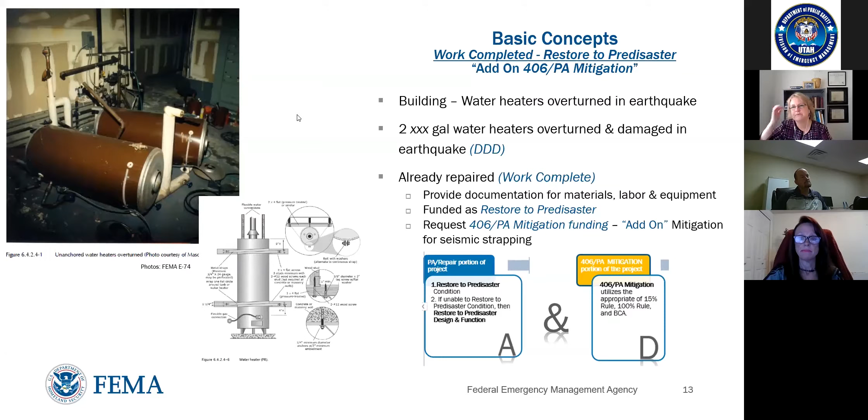FEMA has a lot of really good building science documents. This is from E74 - they have hundreds of things for different conditions. I really recommend FEMA.gov, and that was in the link in one of your handouts.

What is the problem? So, okay, I know FEMA's coming into town, or I just think this will work, and maybe the president will declare a disaster, but sometimes it takes a while. So I'm going to take this informed choice, this informed risk, of putting it back with the bracing.

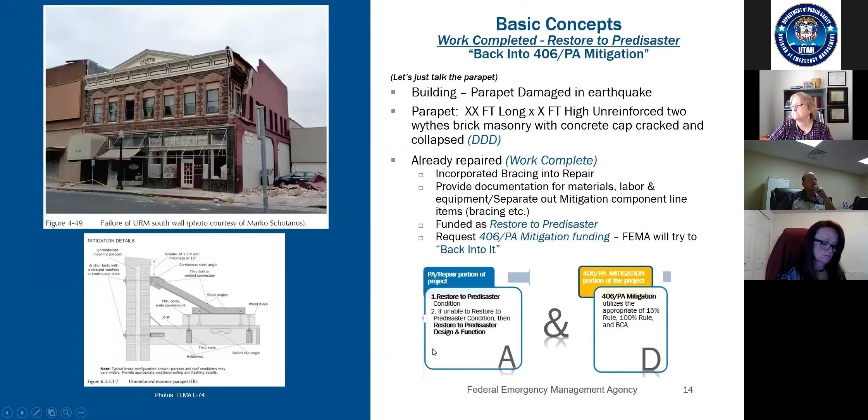You're going to figure out a line item, scope of work, and a cost estimate to put it back exactly the way it was. Now in the process, and Kevin can talk about it more, FEMA puts it back to pre-disaster condition, and FEMA has mechanisms to cost estimate all of this as you go through the process. But it behooves you to get engineered stamped estimates, because it gives you more options early on in the formulation of your project.

So we do the line item, scope of work, and cost estimate for restore to pre-disaster work. You evaluate for the code triggers in B - likely there are none. If this had been broken glass next to a door, then that's where you would have funded putting back the tempered glass.

Then you think about what's the line item and cost estimate for that - how much will the tempered glass cost? Then you can evaluate for the 406 PA mitigation - is there extra bracing? Can we help with the lights and put some extra bracing in? Those kinds of things, and consider that funding.

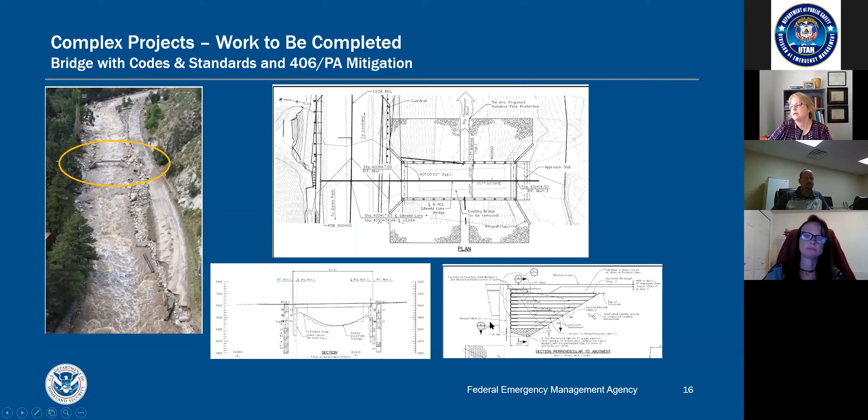So when we talk about the 406 mitigation, will it work? You're addressing the damage. In this case, we did some mechanically reinforced, stabilized approaches. We knew the cause of the damage was water going around the bridge and washing out the approaches, so that's going to armor that. This was a bigger project for the whole corridor, but it will reduce or eliminate similar damages from a similar event by providing a larger opening under the bridge, armoring the abutments, stabilizing the approach road and integral ground. It will reduce susceptibility to debris and erosion damage, and provide increased flow capacity.

The mechanically stabilized backfill supports the approach road integral ground. That's kind of the definition of these kinds of facilities, you have to have compacted soil or cover on a pipe. That's part of the damaged facility, because you have to have that cover. I think that's it.

And we go back to buildings. I want to flag that for earthquakes, FEMA does have specific eligibility criteria for evaluating and repairing earthquake damage for welded steel moment frames. That was the Northridge breakthrough project, the full penetration welds that designers had been using since the 1950s for all these buildings. They all cracked. My coworker had a brand new building at Cal State Northridge, just about ready to occupy, and almost every single one of their welds cracked. That takes removing some of the suspended ceilings and stuff to be able to inspect the weld.

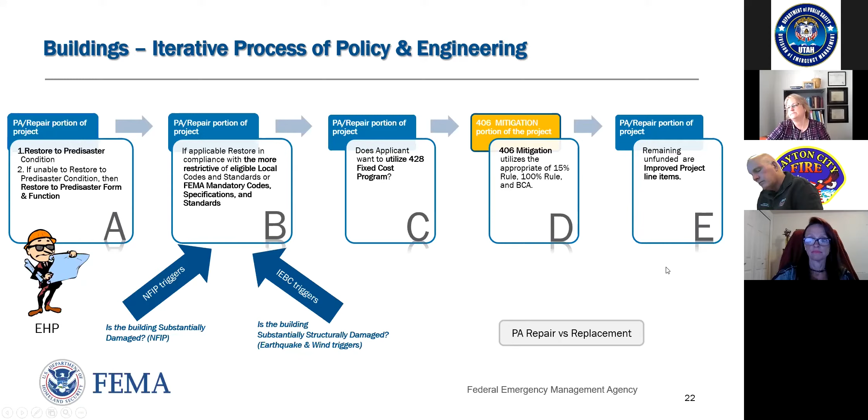So what does all this mean? Even before an event is declared, you are empowered to make informed decisions so that you can take appropriate risks on what you want to go ahead and repair, what you want to wait on, all those pieces. The accurate damage description and dimensions are critical to the project and the funding. It sets up what the restore to pre-disaster condition is, and that funding is what everything else is based on.

An applicant's engineer and the applicant can help define the damage description and dimensions, which leads into what's coming on the next slide, after the break.

You can identify, evaluate, and apply code triggers and code provisions, along with potential 406/PA mitigation measures. They've changed the title in the PA-PPG to Public Assistance Mitigation, but everybody else knows it as 406 mitigation. At Region 8, we're transitioning and using both, using that slash so that we're all on the same page.

You can provide the line item scopes of work and the cost estimates. If it's engineer stamped and signed, that puts extra weight on it being a reasonable cost and appropriate historically, and all of that for FEMA to then validate.

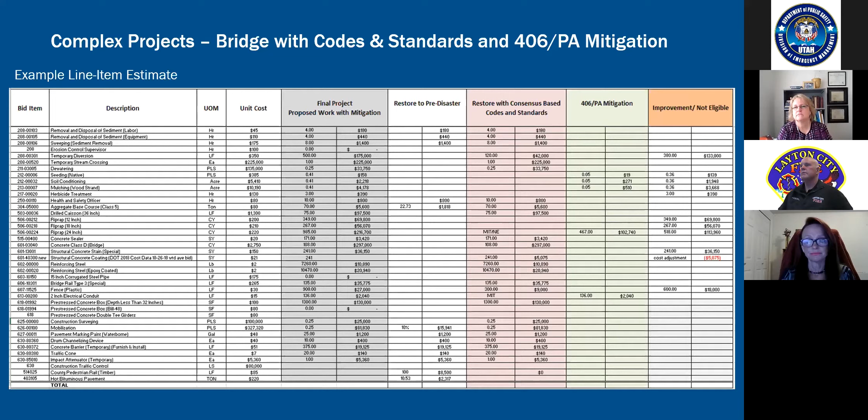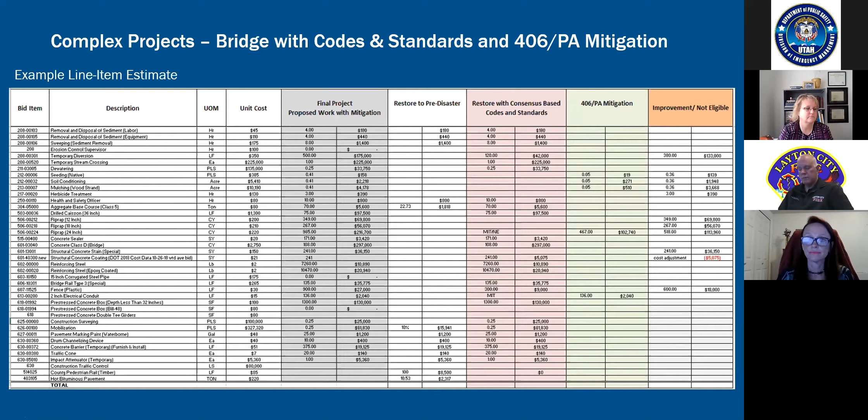Whether it's in this format or something similar, this is how we need to look at the projects and put it back to where it was. What are those codes and standards? Please make citation for them too, so we can reference there and just validate that what you're doing is in there. This allows us to talk apples and apples. It really comes back to needing to agree on the scope of work, the damage description, and dimensions. Then we really start to make those other conversations about mitigation, or is it an improvement?

I see it can be an example. I don't know if Christina or Lori have this in Excel, or if it will be available after the presentation today. The state will be posting it on their hub site. I can't give it to you in a spreadsheet, it's just not ours. That's why I really think in terms of my ABC and boxes, how you do a normal estimate is kind of where I'd like to do it. We'll be sending out the hub site links and all that information, so it's a pretty simple overview they could each type into their own spreadsheet and fix it that way. So we'll give you the idea, you can steal the idea, make it your own.

One other thing I want to mention before we head to break: you, as the communities or as the engineers helping the communities, are the ones who need to bring up what your damages are and what mitigation you want to do. FEMA can't tell you what you're going to do, nobody can give you that. It needs to come from yourself, and if you don't have the in-house ability to look at that and say what's wrong with my building, what went wrong, what got damaged, you need to reach out to those who can, and also reach out to those who can tell you what mitigation would be best so you'd be more resilient in the future.

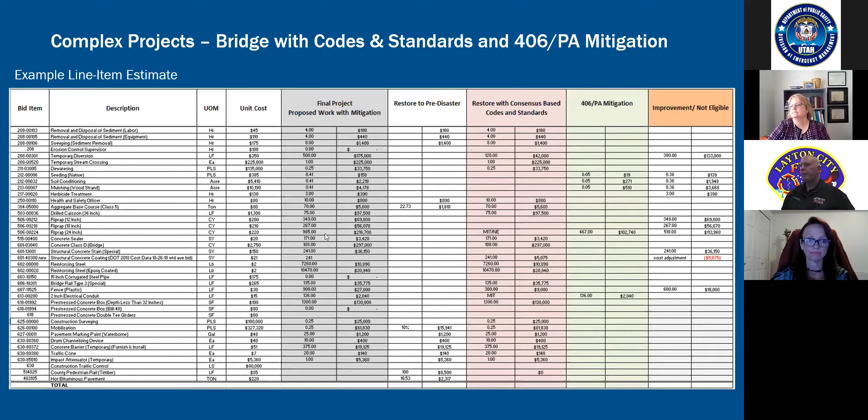But that's going back to step A, identifying what you had 15 minutes before the event and what the condition was.

So that's the important A in identifying that. And that goes back to when we looked at that spreadsheet, all those cost items - it's a mixture of what was there before and what they want to be at after. So that's why it's important for us to take that and identify which column it belongs into.

So back to the Formica - you had Formica, it cost $5 a square foot. You want to put in granite, and that costs $25 a square foot. So you're responsible for the difference there.

Oh, it looks like George has a question. I do. And thank you, Kevin, for answering my question earlier on the chat. But...

Christina and Amber, and I believe Jessica, know all this already, but our church inside has iconography. It is old painted iconography, goes back to about 1925. It is not as simple as just replacing iconography in today's world. It is a specific art and technique. We are in the process now of getting bids on what it would cost to replace some of the iconography that was damaged.

The issue we have is if you replace one icon - let's say it's the big one behind the altar - then the rest have to be replaced because in the Orthodox Church everything has to match up to be uniform. So my question is how does FEMA handle something like that? We may not have every icon damaged, but one replacement would trigger the rest having to be replaced.

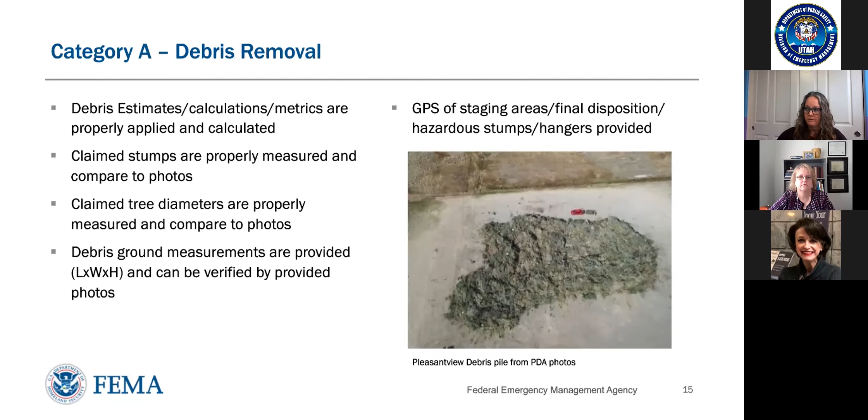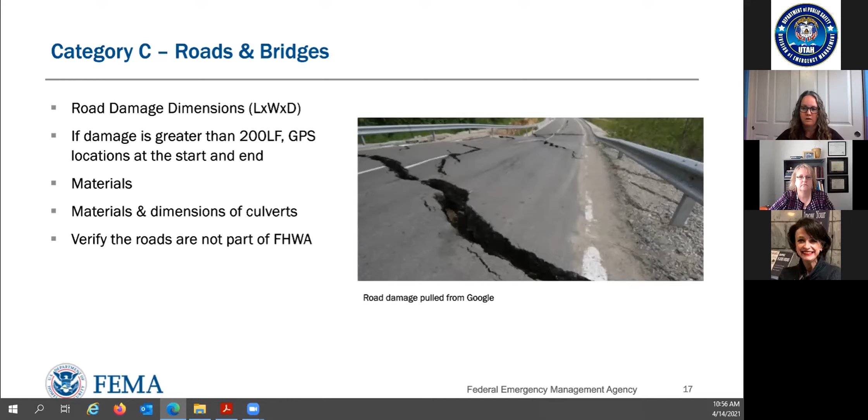If you have any culverts that were damaged, which I'm not sure if we have any for these disasters, but in the event that you do, we need the materials and dimensions of those culverts. And then we're going to verify whether this is part of FHWA. If it is, that's another federal agency. We would look at the type of road it is, and if it would fall under this category.

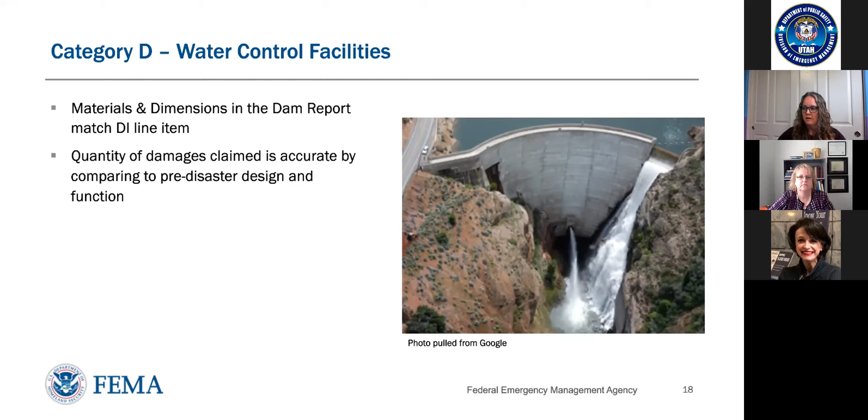So category D, we have our water control facilities. Some information we would need is materials and dimensions. In the dam report, make sure they match the DI line item. A quantity of damages claimed, that it's accurate and compared to pre-disaster design and function. And keep in mind, these are very general comments as to what would be needed. Likely you will need a whole lot more to show your project and how to bring it back to that condition.

Dimensions of damaged components, make sure they match the building size. If you have square footage of your roof that doesn't match the pre-disaster design and function of your facility, we're going to have some questions that are raised. Inventory records, number of levels of the facility, roof type, building materials - make sure they match engineering plans, photographs, technical reports, etc.

Remember that the goal of my team is to draft an accurate DDD. So we want to make sure we're capturing the damage description dimensions of what the event caused, and then contents. The way we think about contents is if you took the facility, flipped it upside down, everything falls - that stuff that falls is your contents. So we would need a contents list and photos of all the damaged items.

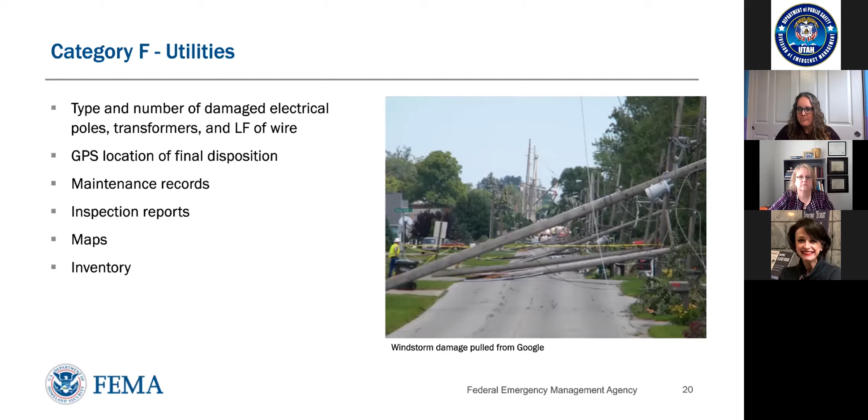GPS locations of the final disposition, such as transformers. Also, if you have a map of the service area that you can show all the sites that went down, that is something that would be very helpful for writing your project. Maintenance records - you're going to need maintenance records no matter which type of category of work this is. That's something that we always ask for in every project, except probably category A. Inspection reports and inventory.

And then our last category is G, parks, recreation, and other facilities. Type and number of facility contents - make sure they match your inventory list, what you had prior and what you have now. Pre and post disaster photos. If you have pre-disaster photos of your facility, that is wonderful.

Something that my team will do during or leading up to the site inspection meeting would be to go on Google Earth and check out the facility. We're going to look at historical photos, and hopefully there's something right after - for major disasters like Hurricane Harvey, they had right before and right after satellite images on Google Earth, so it was really great to be able to see the extent of damage right away. That's not always applicable for every disaster, but that is a common thing that we do when we're validating your damage. And then of course, GPS - that's a repetitive thing. We need the GPS address, location, whatever you can provide to us to show us where this damage is located.

So now we're going to go into conducting these virtual site inspections.

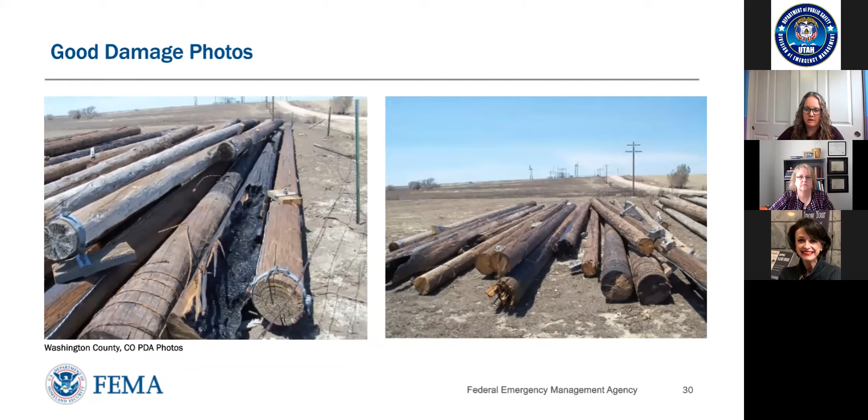Are there any questions on the damage photos right now?

I just want to offer a comment. Since we're doing this virtually, these photos are going to be critical to you being able to articulate the story of what's damaged at your facility or at your park. Think if you were just sending this as a package cold to somebody sitting at their house or in a cubicle in Denver, could they take away from the pictures what you're trying to tell them? We have to kind of recreate it. One of the challenges of being virtual is if we're walking around the building, you can point here and there and show this and that, and we can take those measurements and photos in real time. We really do need your assistance in thinking about it in terms of what you would point out if we were walking through the building or the park together.

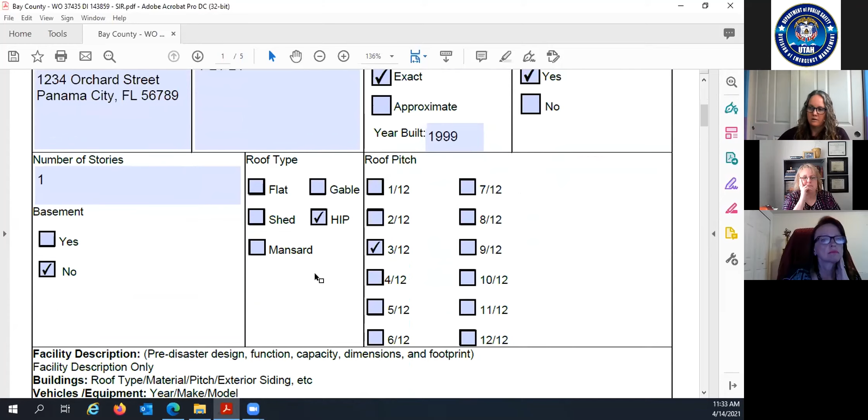So we're gonna select, this is a building - we're actually looking at a gazebo. We made this up for purposes of this training right now. So we're gonna put the physical location address. We have the GPS coordinates, whether you have the exact age or the approximate age of the facility. If you only have approximate, that's fine, we can click that. That's just gonna show you how that is written up in the DDD. If you have legal responsibility, we're gonna select what kind of roof is on it, the pitch, whether there's a basement, number of stories.

This next box shows the facility description, pre-disaster design function, capacity, dimensions, and footprint. So as you can see, this is a gazebo at this location. It's used for gatherings at the H.G. Harder's Park. The park is a 76-acre county park with athletic fields, concessions, picnic pavilions, and playground. This is the size of this gazebo.

And you'll see at the bottom of every page, there's an area for you to sign. So all the information on this page is correct, I'm gonna sign it and approve it. And then the recipient authorized representative's signature as well. So the state can sign these forms as well, saying we all agree that this is accurate.

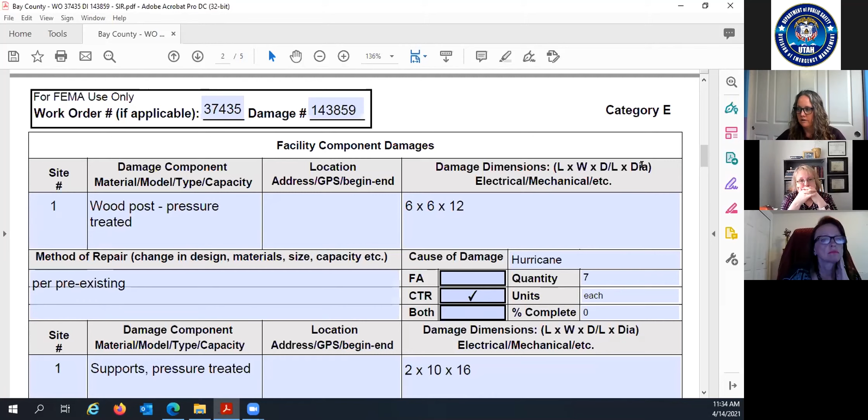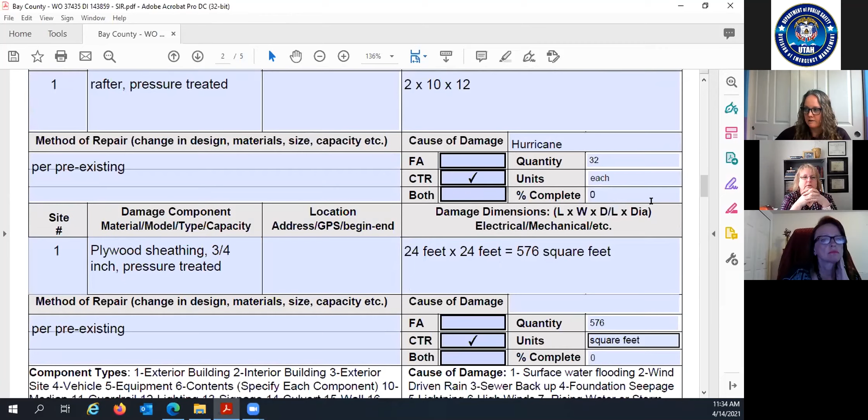So then we go into the site component breakdown. This is where I said we have that Excel sheet that lists all of this information. As you can see on this page, it only lists 5 or 6 sites. And that's it. We go into the sketch next.

So if there's more components than 6, we're going to use the Excel sheet. But you'll see we're talking about this one site, that's all we're writing a site inspection on. We have wood posts that are pressure treated, and we have our dimensions over here. There's no GPS here because we have it up above, but we can put it again in these locations as well.

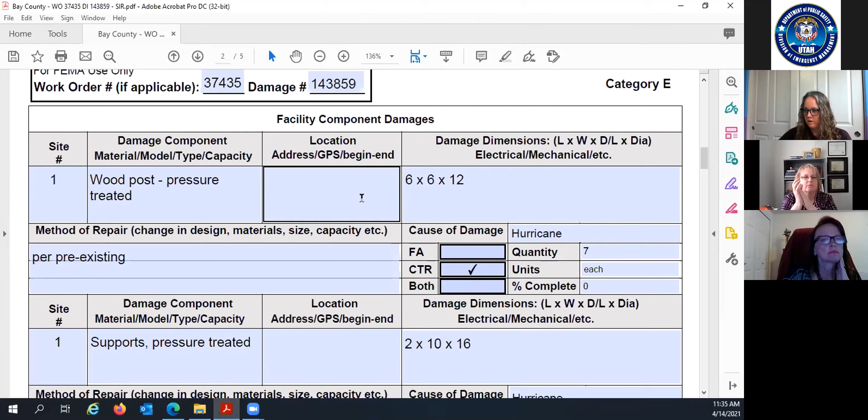The method of repair, we talked about this earlier, things that we'll need in preparation for the site inspection. So are you repairing pre-disaster? It was caused by the hurricane, the amount of wood posts that we would need to restore this facility, and the unit.

These are all - I don't know if this is a drop down. I know on the Excel sheet they're drop downs. This might just be, we have to type in whether we're talking about each, square foot, or cubic yards, etc. And percentage of work complete.

So when you create all of your damage inventory line items, it's early in the disaster, and sometimes these go on for quite a while. Your percentage of work complete could change as we get closer to the site inspection. So if the DI says 0%, and right now when we're doing the site inspection it's now 50%, that's what we would put there.

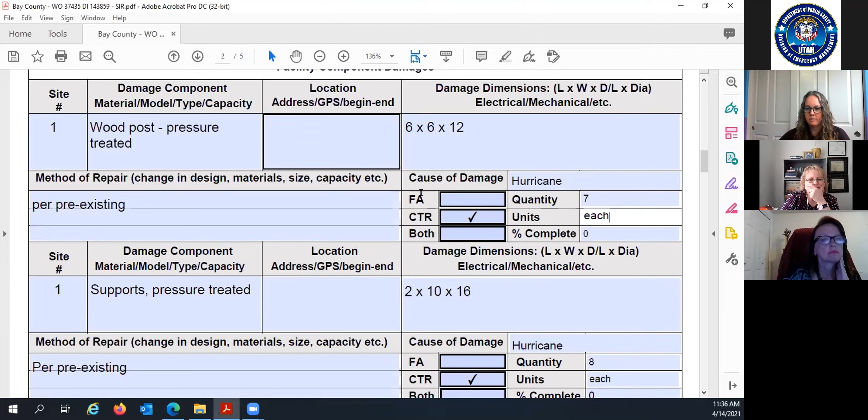The type of labor - are you doing this work by force account labor, or are you going to hire a contractor to complete this work? And we're going down for the other areas of the damage elements.

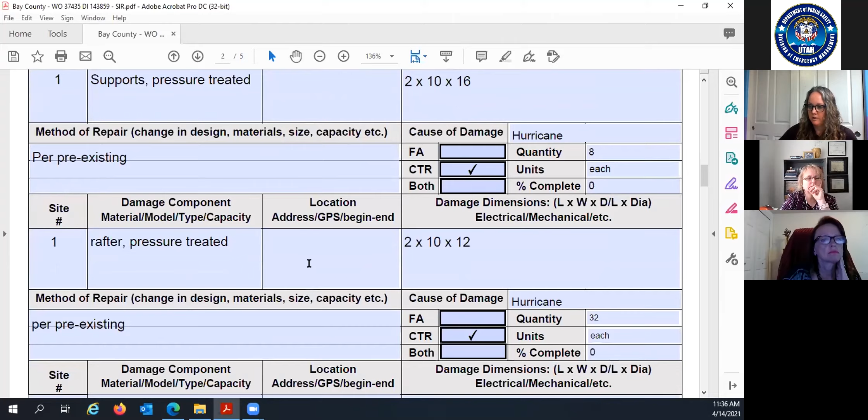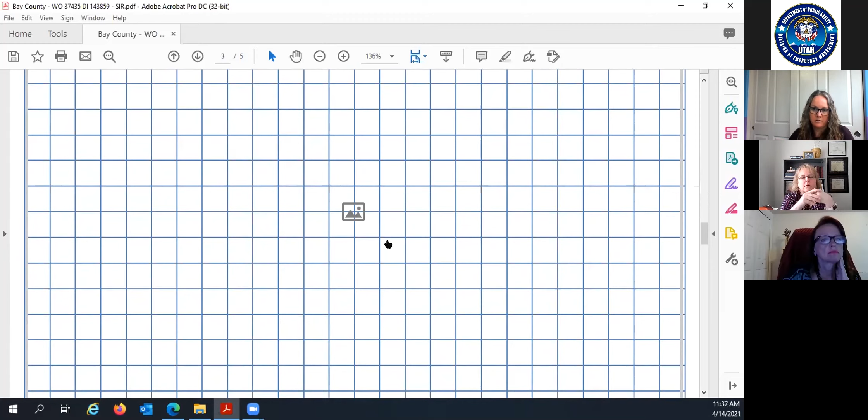Again, signatures. This next page would be if we have a sketch. We're not always going to have that, but this is a location that, say it was a campus of facilities - you could put the map of the campus right here and highlight the damaged facilities that are on that campus, because that project would be that campus, right?

And then the next page, we get into our special considerations. So we have our mitigation considerations, which we just talked about. So again, specify the cause of damage, hurricane and wind-driven debris. These are yes or no. If you're unsure, we can select unsure, but we're going to ask for a comment why. We just want to make sure that mitigation has all the information they need.

And then, like I said, the insurance consideration - do you have insurance on this facility? And then we get into the EHP consideration questions, and this is the final page of that. So once we have all of this filled out, I'm going to stop sharing this and then show you the DDD that we've created.

All right, so we're going to take everything off of the site inspection report, put all that data into Grants Manager, into our work order, and that will generate your DDD, which is your damage description and dimensions. So all of that information we've talked about needing prior to the site inspection, this is why. This goes into the DDD.

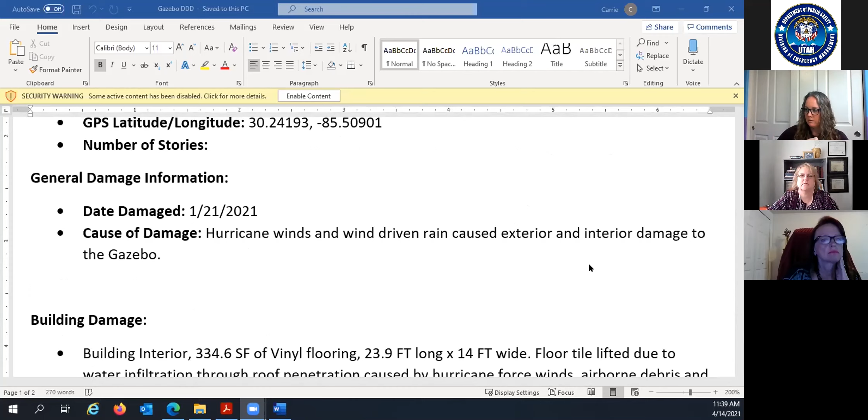Then we took all those sites that were listed on there, the wood posts, the pressure treated supports, all of that stuff. We fed that into the system and this is what it spits out. So this is what your DDD will look like.

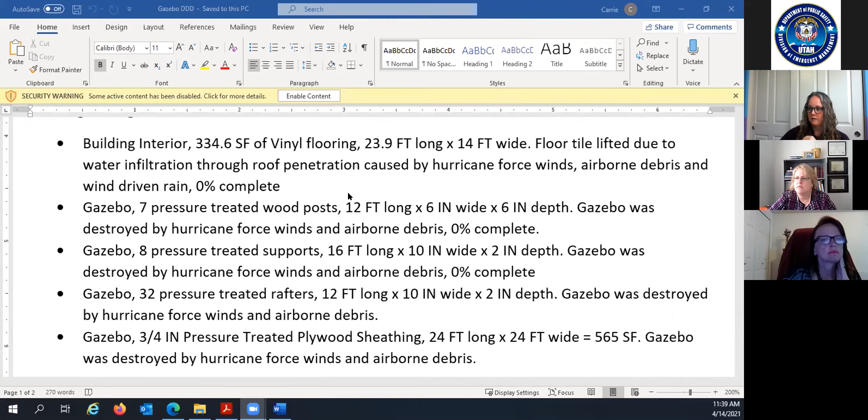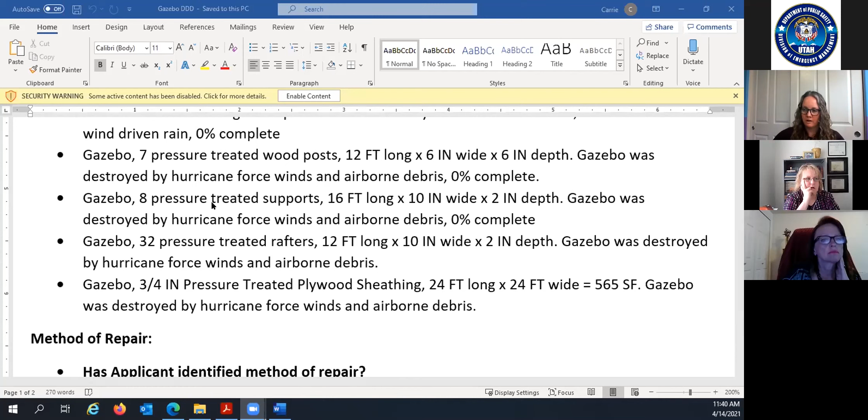Ignore the vinyl flooring. A gazebo, 7 pressure treated wood posts, 12 feet long, 6 inch wide, 6 inch depth. Gazebo was destroyed by hurricane force winds and airborne debris, 0% complete. It'll list every component of that damaged site. If you have a building with separate rooms, they will be listed that way. And I can show you another DDD that shows that as well.

So method of repair, these are the questions that come up. There was no change in material, no change in size or footprint. 4 components are work to be complete. They're going to perform this by contractor. Let me pull up another DDD just to show you another example.

And this is actually pulled from Grants Manager. So this is not of the gazebo, this is a road. But you'll see that in Grants Manager, this is what we see. We see the site inspection tab, and then we can preview the damage description and dimensions, which appear right here. So we have the facility description, approximate year built.

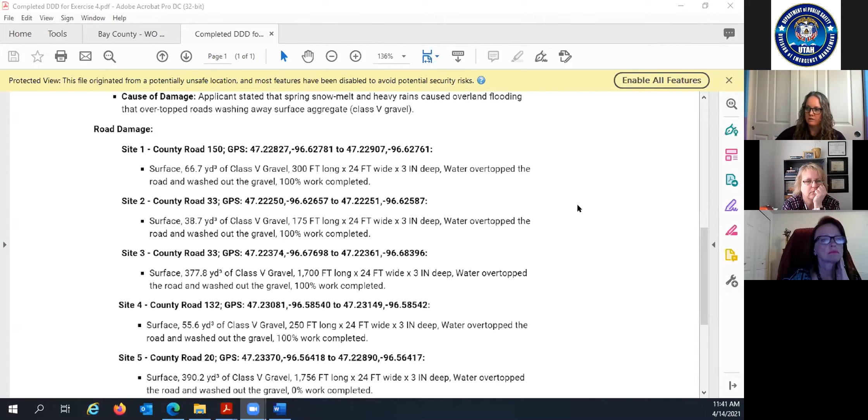Like Kevin said, if this is more than 45 years old and you did a major remodel, we'll need that year of the major remodel as well. And it just goes down to breaking down each site. So this is a category C project with multiple sites on these roads. So it'll list the exact damage per site.

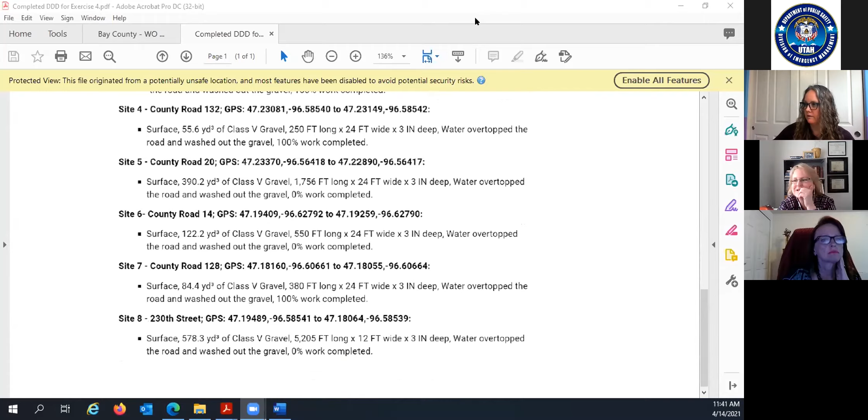Thanks, Carrie. While you're doing that, the question came up that I think we could answer quickly: will you be providing the Excel spreadsheet for the additional sites? Yeah, I don't see why not, we can provide that component listing. It's a template, so keep in mind, don't change anything on it, because if you change stuff it will mess up us uploading it into the system. Don't add more columns because you want to. It has to be that specific format for us to upload it and generate the DDD.